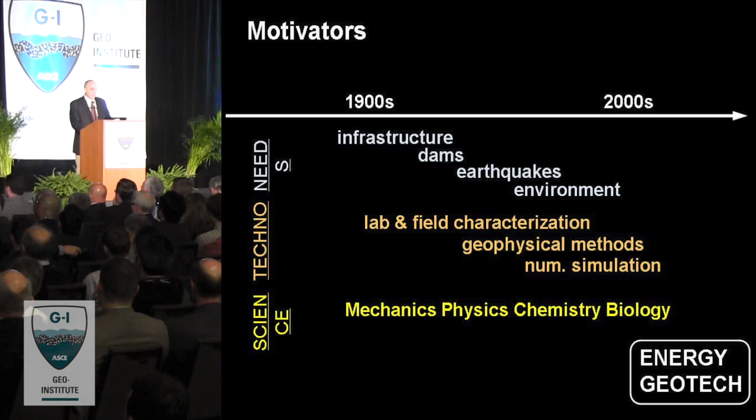Today, I would like to explore the energy challenge. Why energy? Because whenever we seek the ultimate goal of having a pleasant life with great quality of life, we see that it is basically controlled by the availability of energy.

It is so much so that if we plot most quality of life indicators, they exhibit a great correlation with power consumption, be that life expectancy, infant mortality, or ability to receive an education. Some of these parameters can be combined into an index we call quality of life, and we see the very strong correlation with power consumption.

We can track these numbers for the last two or three decades, and we see a very clear trend: all countries are improving quality of life. That is the good news.

But we're all doing it at the expense of consuming more energy, to a point that this may become unsustainable. Today we consume 17 terawatts. That is a huge number. And in the next 25 years, we are going to have a demand for 50% higher energy consumption.

Let me put this in perspective. That would be approximately 10,000 nuclear power plants of the largest ones we've ever built, and we have only built about 500 in the last 60 years. This is the amount of additional energy we will have to produce to sustain current growth.

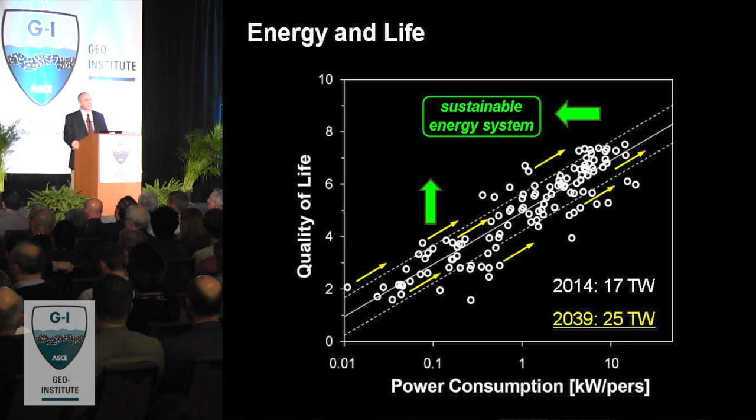So I think that as geotechnical engineers, we have to think very seriously about what we can do to contribute to the development of a sustainable energy solution, whereby the developing world can increase quality of life with minor increases in energy consumption, while the developed world can decrease power consumption while still improving quality of life.

In order to understand some of these problems, it is good to go back and see what our energy sources are and what is the origin of those resources. Let's focus on one of them: fossil fuels. 85% of our energy or more, worldwide, is based on fossil fuels. That means coal, gas, and petroleum.

And you may wonder, how did those form? Let's look at the history of the Earth as geotechnical engineers. The Earth is approximately 4.5 billion years old. At the beginning it was abiotic, and life appeared approximately 3.5 billion years ago. During that early stage, the atmosphere was basically a heavy CO2 atmosphere, but microorganisms fed with energy from the sun began capturing the CO2, converting it into organic mass, organic carbon, and releasing oxygen, and that had a tremendous effect changing the atmosphere. In fact, many of our minerals today are oxides and carbonates, both the result of the effect of these microorganisms.

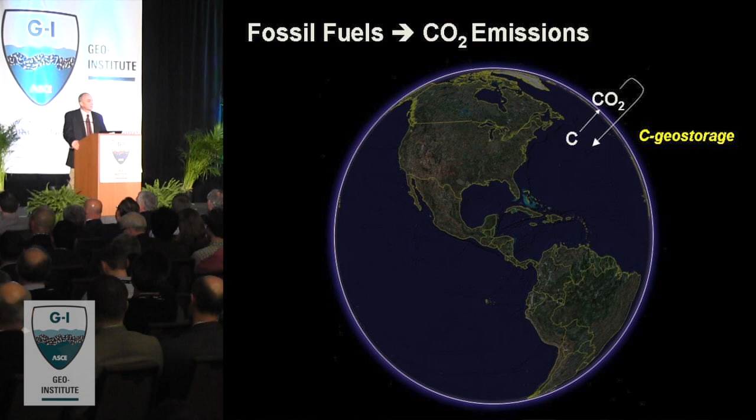When we analyze all the energy resources, we can go one by one, and in the manuscript you will find fairly extensive energy cards where I summarize all these geotechnical needs. There are few lines that are common denominators for all the energy resources.

We need to do proper site characterization, to get the right material properties for design, to develop proper monitoring strategies incorporated into reservoir management and disposal management, and to design the infrastructure not only to build it, but also to retrofit it. And why not to decommission it?

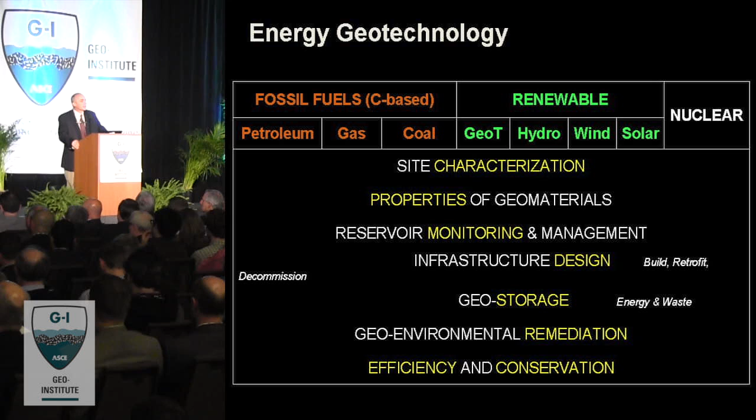We are in the process of decommissioning major nuclear power plants with great challenges, I may add. Furthermore, there are great needs for energy storage, as well as for the storage of energy waste, being fly ash, nuclear waste, or CO2. And of course, there are plenty of environmental related issues, and why not make our processes more efficient and conserve energy in so doing?

So as we are facing such a great challenge, we have to go back to the fundamentals, like Terzaghi did in the 1920s. This is a wonderful quote. Terzaghi said, Coulomb purposely ignored the fact that soils consist of individual grains. That was very useful for a while, but in fact it became an obstacle against further progress. So we need to go back and recognize that soils are made of grains in order to advance.

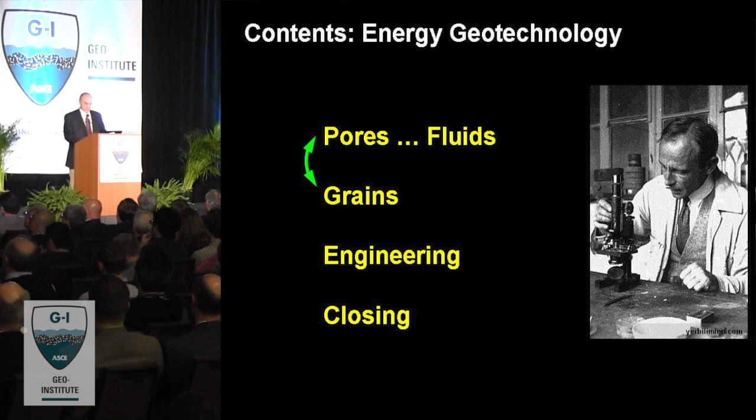And I'm taking that once again today, almost 100 years later, for the second part of the presentation, which will look at the essential of soils. And we are going to see the grains, but also the counterside, which are the pores, and the components that fill the pores - that means the fluids. And then the couple of evolving engineering problems.

So let's start with pore fluids. And you're going to see a sequence of nice movies and images. But once again, the important thing here is to understand the complexity of multiple processes that coexist. And the reason why fluids become particularly important in the energy sector is because there are so many of them in so many different phases. In our field, we have basically considered water and air, vapor, and to some extent the NAPLs and dense NAPLs.

Now the variety is much more extensive. So let's make a brief list. We can encounter gases, not only air, but also methane and CO2. CO2 with pressure and temperature becomes supercritical, or it could liquefy. We also find water, and in many places we are looking for layers filled with brine. Oil, of course, that will range from light to heavy oil, and sometimes solids will precipitate, or liquids may form ice or hydrate. We will observe some of these as we move along.

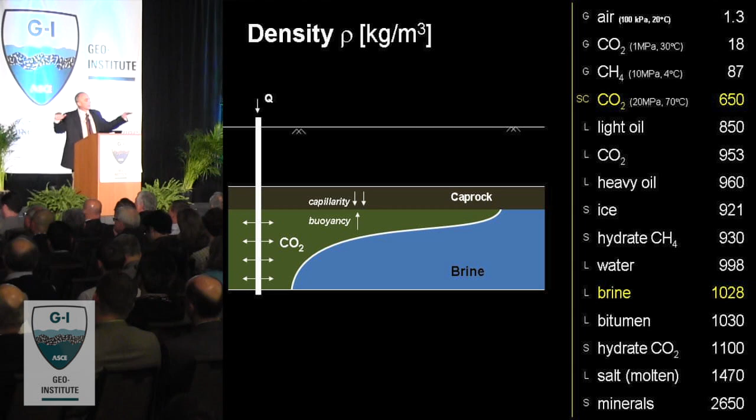There is a huge range in viscosities. When we talk about hydraulic conductivity, we pay attention to water, and that is controlled by the inherent permeability, which is basically varying in more than 10 orders of magnitude due to the specific surface and the pore size. Now we have to also recognize the viscosity. And as you can see, viscosity changes also in more than 10 orders of magnitude. The combination makes this combined parameter in a huge scale.

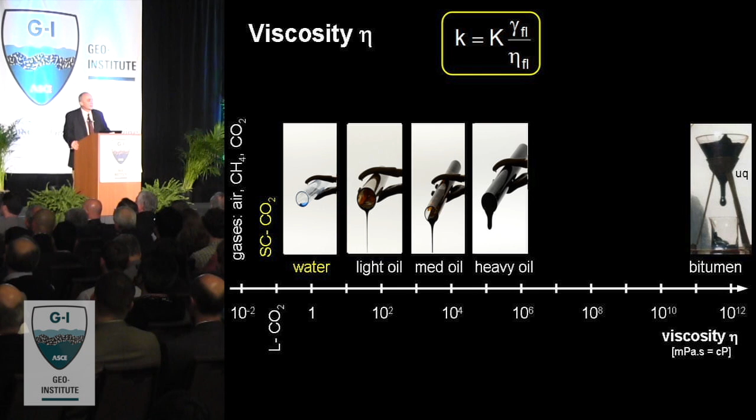By the way, it is not clear whether the last image is running or not, because that drop will fall in the next 8 years. That is the longest running experiment.

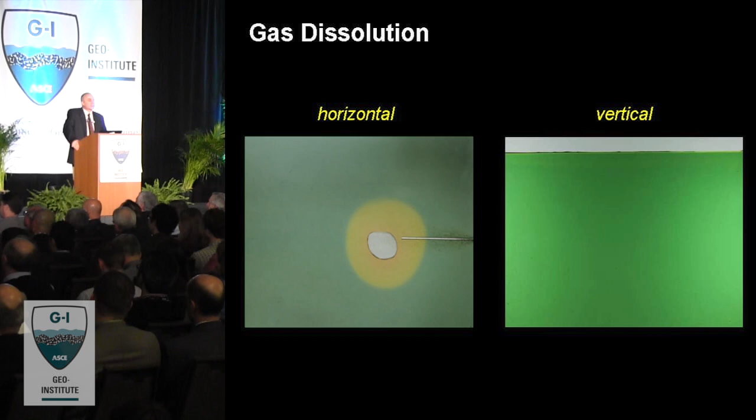Now, when we have gas and water, and we begin pressurizing, the gas tends to dissolve in water to different extents. On the left-hand side, you saw a droplet of CO2 dissolving in water. Water has a pH indicator, and what you actually saw is that as the CO2 was dissolving in water, it was acidifying, forming carbonic acid. That is the low pH of Coca-Cola, and it was diffusing away into the soil.

These are all time-lapse photography, so they are played at high speed. On the right-hand side, you saw that the CO2 is on top of the water, and as the water intakes the CO2, it becomes heavier, and it creates these tears and convective currents that will sustain the process going. This is the dissolution of gases in liquids.

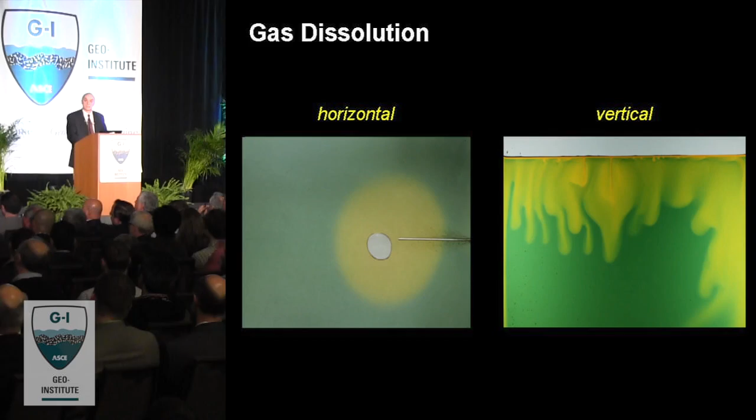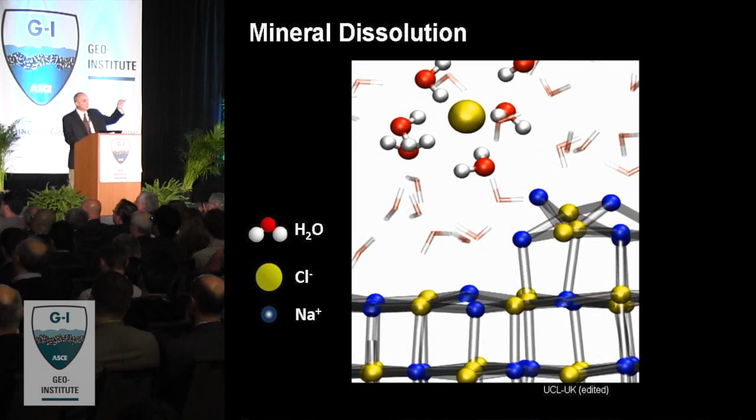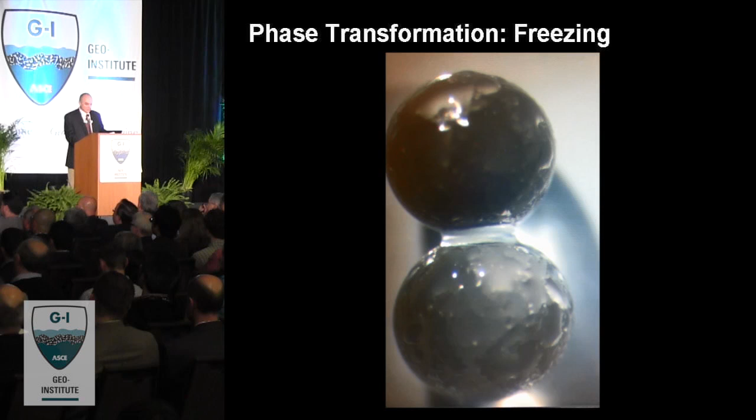When there are phase transformations, the water freezes, and it will all depend on whether the water likes the mineral or not. It will actually form an ice sheet on top, or it will just remain localized at the contact. But there is one type of phase transformation which is quite exceptional. Typically, when water freezes, it excludes anything that is not water, for example, ions. However, if there is methane, the methane molecule can get locked in, trapped, surrounded by water molecules that form a cage. This is called methane hydrate.

It takes relatively high pressure, let's say 600 meters beneath the ocean, and low temperature for this to happen. But you may be surprised to know that we find methane hydrates offshore pretty much everywhere around the world and beneath the permafrost. And there is more carbon trapped in methane hydrates than in coal, petroleum, and gas. So this could eventually become an exceptional energy resource, with a caveat that if it gets released into the atmosphere, it's a devastating greenhouse gas.

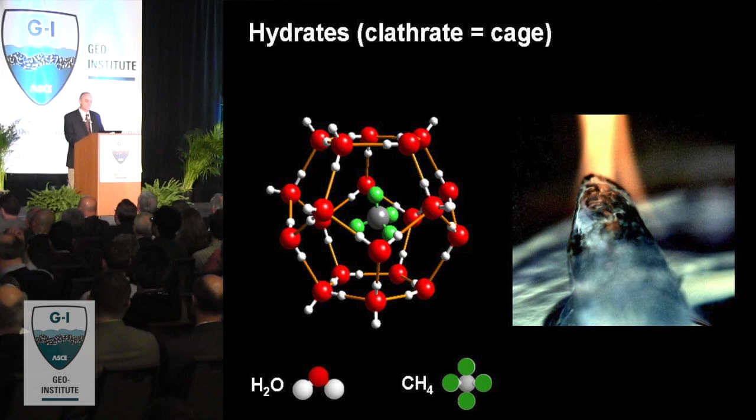Another part of the fluid-related processes that we need to recognize is that there are many of these processes that produce very pronounced volume expansion. Of course, we're all familiar with the expansion of water to form ice. That is only 9%. When we open a Coca-Cola can, it will expand probably 50%.

If we take methane hydrate, the one I just showed you before, these little cages of water with methane molecules inside, it will expand 176 times, not percentage, times. And of course, the wonder of the steam engine is that when water vaporizes, it expands more than 1,000, almost 2,000 times. Let's put that into perspective. When we take a soil and we shear it and measure the volumetric dilation, that rarely exceeds 10%.

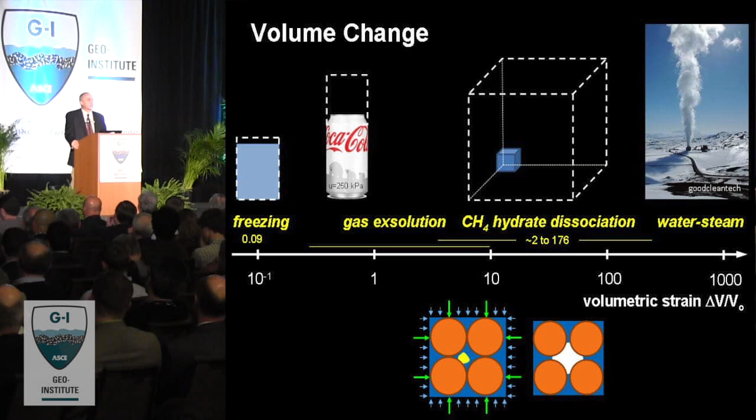So now imagine having these fluids that will expand hundreds of times. What will it do to effective stress and then soil behavior? What you see is a little sketch of a methane hydrate crystal at the center that will expand when we reduce the pressure. When we sample it, it will expand this 176 times. And it will develop capillary forces that will push grains out. What you are going to obtain with standard sampling is something that looks very much like chocolate mousse, a completely destructured sediment that is impossible to characterize. We will come back to this.

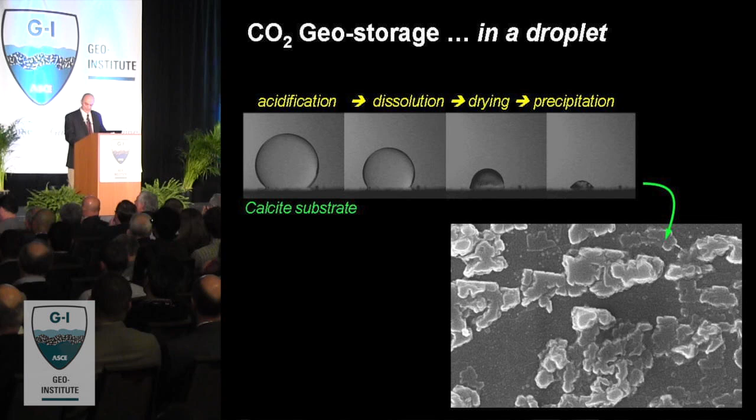But CO2 dissolves into the water, and it makes it acidic, and it begins dissolving the calcite crystal. When water continues evaporating, it cannot handle the dissolved calcite anymore, and it will reprecipitate it on the surface. Let me show you that that is indeed the case. When you look with a scanning electron microscope, you see all the reprecipitated calcite. These two processes, dissolution and precipitation, are going to be continuously occurring. In fact, they are continuously occurring in our sediments, but are going to be exacerbated in energy applications.

To summarize the first part of pore fluids, we can encounter them in many different phases. They have a very wide range of properties. They will trigger dissolution and precipitation exsolution processes. There will be phase transformations, and in many cases, those will be accompanied with very large volumetric changes, which will dramatically affect soil behavior.

If there is anything that in our field we have made great advances, and that we are the holders of understanding that nobody else has, it is in unsaturated soil behavior.

As you saw earlier, this is all going to be pretty much about mixed fluids. So my question now is, for all those of you who work in the field of unsaturated soils, how easy it is to transport our knowledge to other energy-related applications.

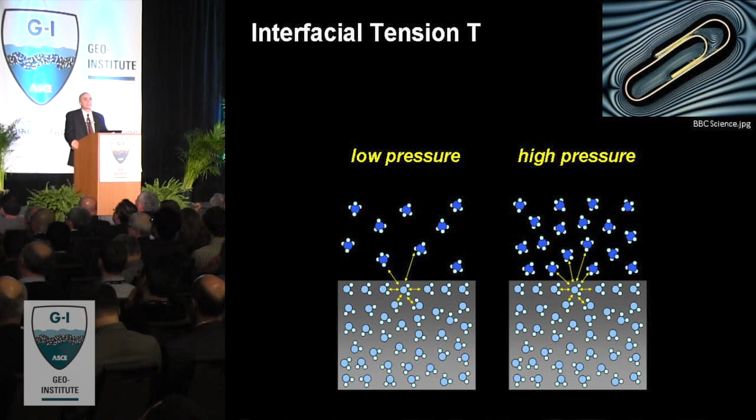Well, it all starts at the molecular scale. The reason why we can float a paper clip is because of the formation of this interfacial membrane that develops at the interface between two fluids with limited miscibility. On the left-hand side, in the lower part, you see water surrounded by methane molecules at low pressure. There is limited compensation of intermolecular forces. But as we increase the pressure on the right-hand side and we have a higher gas density, there is better molecular interaction, better compensation, and interfacial tension should decrease. Therefore, interfacial tension is pressure dependent.

Now, the contact angle, when we have the two fluids interacting at the mineral surface, also becomes pressure dependent. And the fluids may like the mineral, depending on their mutual preferences, or not. Typically, we always talk about capillary rise - that is when the water likes the mineral. But you could have negative rise in the case of, for example, oil or mercury.

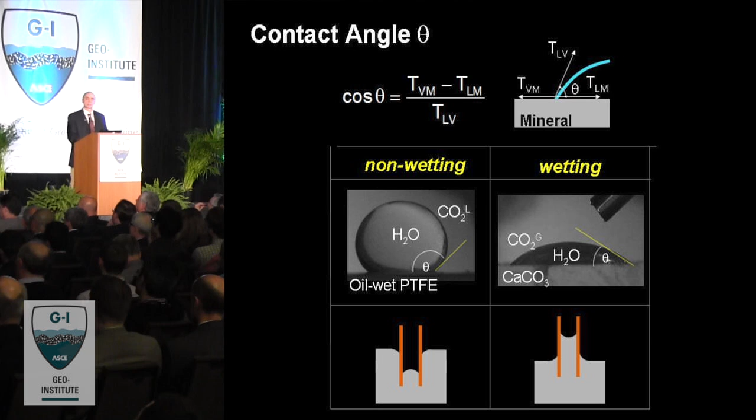So we have to pay attention to these two parameters in understanding unsaturated soil behavior in the largest scale of energy applications. Let me demonstrate that this is indeed the case, that pressure alters these parameters.

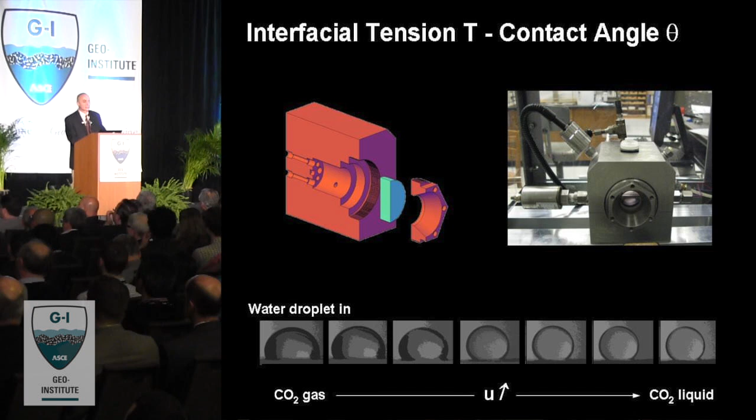You are watching through a very thick sapphire window at the water droplet on top of Teflon. We surround it with CO2. We begin squeezing the CO2, increasing the molecular density, and you see how the water droplet changes shape dramatically. The reason is the contact angle is changing. The CO2 likes Teflon more than the water does, and the interfacial tension is changing. This is going to happen within the reservoir.

To summarize, in our field of unsaturated soil behavior, we have consistently thought of pretty much water and air - that is 72 millinewtons per meter surface tension. But actually, this can change in a wide range, and we can actually engineer it with detergent, with surfactant, and bring it down to very low values indeed.

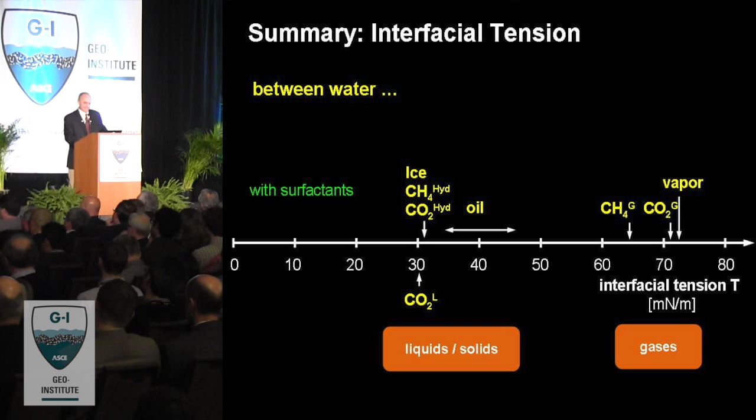At the macro scale, there are a couple of fundamental concepts that we use extensively. One is suction, the pressure difference between the two fluids, and the net stress, which is the difference between the boundary stress that we apply and the air pressure.

The other macro scale concept that captures pretty much the structure of the soil is the soil water characteristic curve, that gives us an idea of how the fluid is interacting with the pore size distribution and pore size connectivity in the sediment. I will not mention much more about the entry pressure, but it's going to be a very critical parameter in many aspects of the energy cases.

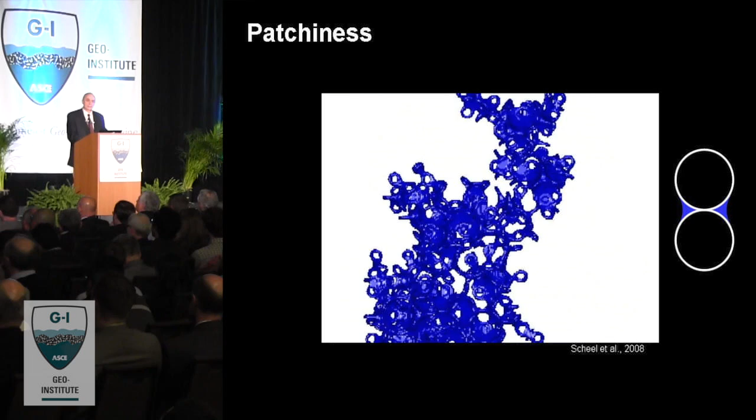And you see that these water menisci form interconnected patches of water, and everywhere else, there is pretty much not water. Therefore, imagine the interparticle forces with the addition of the capillary forces. This is quite a complex and inhomogeneous situation, which adds some complexity to our understanding of unsaturated soils.

Precipitates would like to do so in the largest pores. So if we have hydrate formation or mineral precipitation, this will occur in the largest pores. And if we close the largest pores first, our soil water characteristic curve will be significantly affected, particularly on the right-hand side, where the entry pressure is.

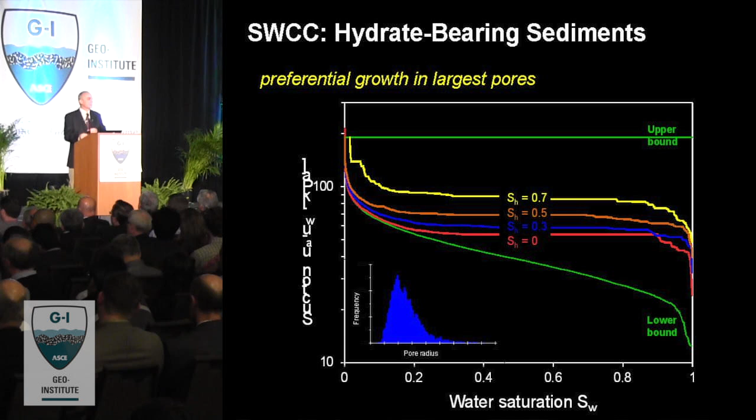Now, if we begin dissociating the hydrate, the soil water characteristic curve is changing because we're removing that solid. And so we have a continuous time-dependent process, adding significant complexity to all this analysis.

Another departure from what has become classical in unsaturated soils is the fact that in unsaturated soils, the air invades quite homogeneously the previously saturated medium. However, when you open a Coca-Cola bottle, you create bubbles, you nucleate bubbles everywhere. That means that when...

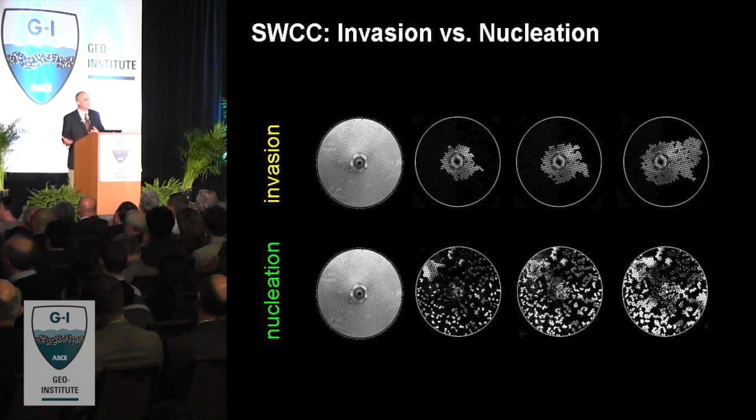water with dissolved gas or oil with dissolved gas, what is called foamy flow, or hydrate begins dissociating, we're going to see gas developing everywhere, like you see on the lower micro model on the lower set of images here. The upper part is when there is invasion. The lower part is where it nucleates everywhere. So we have to rethink what are the implications to the soil-water characteristic curve, the Van Genuchten equations, the relative water and gas permeability, etc.

Finally, in this reanalysis of unsaturated soil behavior, I would like to highlight that we tend to assume that there is thermodynamic equilibrium. That means that things have homogenized throughout because it has been the result of a slow process. In fact, many of these tests take typically 6, 8 months or 1 year to do a proper soil-water characteristic curve test.

However, that is too long for the removal of petroleum or gas. So there will be no thermodynamic equilibrium, and in fact, what is going to happen is that we mobilize viscous forces. If we're injecting CO2, remember supercritical CO2 has much lower viscosity than water. That CO2 is going to go through the largest interconnected pores and finger through, and the rest of the brine is going to remain behind. We're going to have very inefficient invasion when we inject CO2.

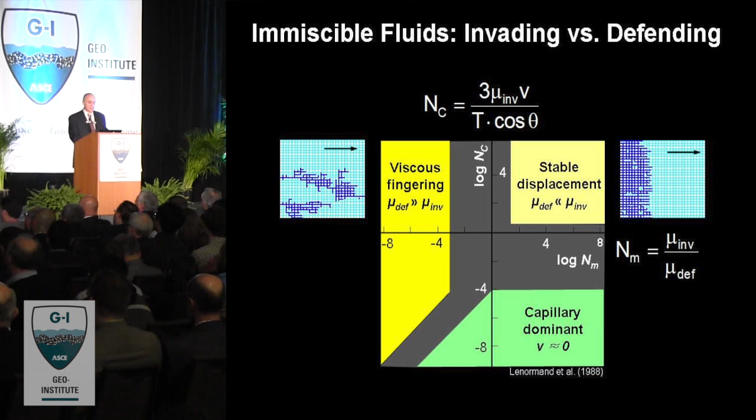Conversely, if we were pushing a very viscous fluid against a defending saturating fluid of low viscosity, we are going to have a more homogeneous front. On the lower half of this plot, we have classical unsaturated soils. On the upper part, where velocity gains relevance over capillarity, we have to look at the relative balance between the fluid viscosities.

Without any further demonstration, I'd like to say that it may surprise you, but the same way we talk about interfacial tension between water and air, or water and oil, vinegar and oil, there is also interfacial tension between water and ice, water and hydrates.

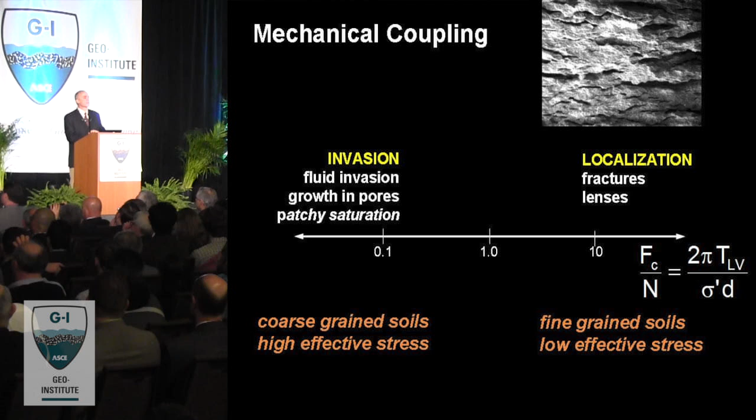We can extend all these concepts to all these other materials. For example, if capillary forces are greater than the effective stress-related forces, which happens when effective stress is low or the grains are very small, capillarity will prevail, and we form gas-driven fractures, ice lenses, hydrate lenses. Otherwise, when effective stress is high and capillary forces are small, the diameters are large, we have a completely different invasion mechanism and pattern of solids.

To summarize mixed fluids: we need to recognize the wide range of fluids involved and their phases. The surface tension and contact angle are not constant anymore, and in fact they vary with pressure, and we may control them, we may engineer the system.

The residual saturation that we're concerned about in unsaturated soil behavior is what controls our ability to recover gas and oil. In fact, we leave approximately 50% of the oil in the reservoir because of residual saturation. That entry pressure that we didn't say much about is the one that controls how far that pancake of CO2 spreads out and whether the seal rock will be able to hold the pool underneath. The soil water characteristic curve has to be reconsidered, and there are several instabilities that may affect the process, and we need to understand them better to analyze these systems properly.

That was one part of the presentation. We were looking at the fluids and the pores. Now I would like to look at the grains that make the sediments. We are going to do it in three stages: the genesis, to pay attention to post-formation changes, and I will highlight why, and then to look back and reconsider classification of soils.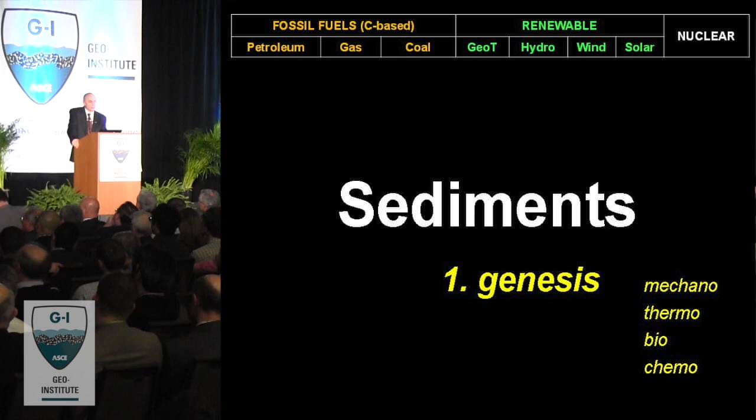We typically talk about genesis as weathering of rocks followed by a transportation agent. Well, when we look at the whole energy sector, we run short with such descriptors. In fact, we have to look at mechanical, thermal, biological, and chemical processes in the formation of grains. A few slides to demonstrate the case.

Mechanical forces are big enough when the grains are large, so the impact between grains can cause damage, or the abrasion between grains can alter their shape. Therefore, mechanical forces can only explain the formation and evolution of coarse grains and a few soils, for example, beneath glaciers.

Thermal processes are also very critical. This is an artificial one, man-made, which is fly ash. Because it formed from a melt, you see the effect of surface tension in this nice spherical shape of fly ash. By the way, the fly ash had lots of gas during formation. Some of these will be hollow, and some will be like cenospheres. Be careful, the specific gravity is not 2.65 anymore. It can be from 1.7 to 2.2, 2.3, which completely messes up our thinking of void ratios, etc.

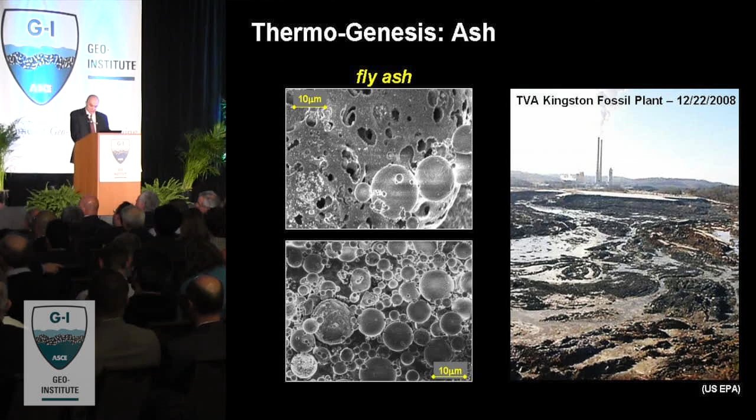These materials, even when we call them non-pozzolanic fly ash, do develop some early diagenesis, let's say within a week. They increase their stiffness significantly and may lock porosity because they will not consolidate so nicely. Some of the consequences are seen, for example, in the failure of the TVA Kingston storage, almost six years ago now, five years ago.

The natural example of that is volcanic ash. The same happens when molten lava explodes and comes out. Typically we don't see this, but you also see the surface tension here in the shape. Most likely it came out with so much gas that those bubbles actually exploded, and you see the shreds, the shells, the pieces, and the concave shapes left by the gas. This is, for example, the formation of Mexico City soils.

By the way, the volcano is called Popocatépetl.

That's to practice the language there.

Those ashes fell on a lake, and water-mediated processes of dissolution and reprecipitation form what is Mexico City soils today. However, how can we explain that a soil with a liquid limit that can reach 400 can exhibit a friction angle that can exceed 42, 44, 46 degrees?

We need to look at the other genesis, which is biogenesis. There was lots of bioactivity in the lake, and that led to the formation of diatoms. Whenever we encounter diatoms in our soils, like the Cooper Marl, Ariake clays, or Mexico City clays, we always see exceptional combinations of liquid limit and friction angle that we cannot explain otherwise.

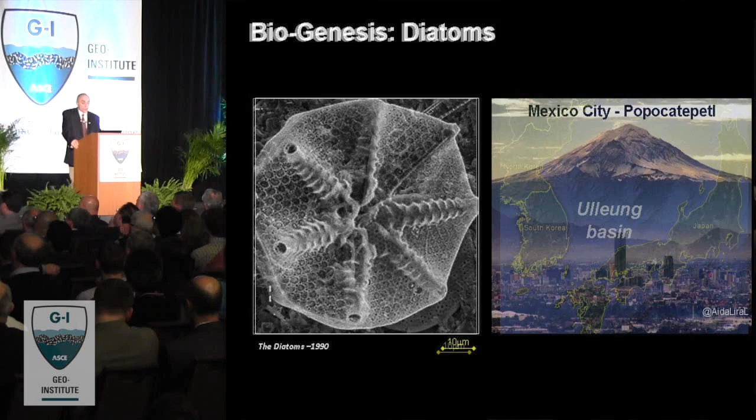When we go offshore, here I'm showing an example from the Ulleung Basin between South Korea and Japan, we encounter complete layers. You still see some diatom here, but everything else is crushed diatom - very small pores, huge porosities, behavior that is non-plastic, yet very high liquid limits.

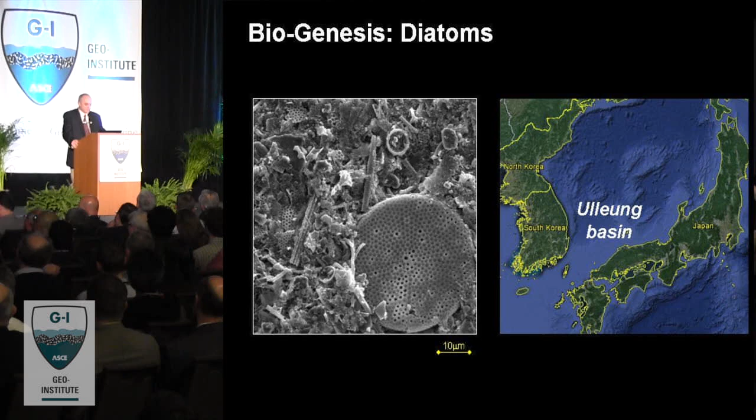So we saw that there are different formation mechanisms leading to different particle shapes, different sizes, and different mineralogies. Let's explore the consequences of size.

When we analyze all the forces acting on particles - the forces that cause motion of particles, because there wouldn't be strain, there wouldn't be shear without unbalanced forces at the particle level - we realize that these forces all depend on particle size, either linearly, quadratically, or cubically.

Just for the sake of this presentation, let me explore the balance between a couple of these forces. On the lower part of this plot, you see the balance between the effective stress-induced force on grains of different size, when the effective stress is just nominal - 10 centimeters of soil, 1 kilopascal. You also see the capillary force that can be mobilized between grains due to the water menisci that forms between grains.

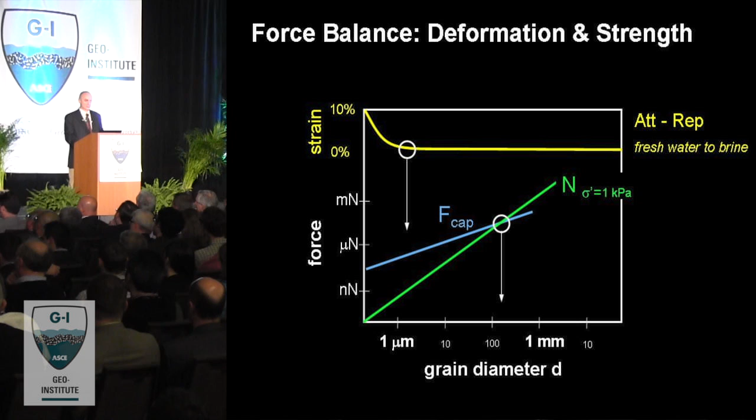Therefore, there are two very important ranges here where the physics changes. For small particles, we have to begin paying attention to capillary and electrical forces. Summary: we have already seen the relationship between genesis, size, shape, and forces.

And what is very interesting here is that that is where the sieve 200 is. The sieve 200 is an exceptional choice. It's more than just a convenient choice for laboratory purposes - it's an exceptional choice from a physical point of view.

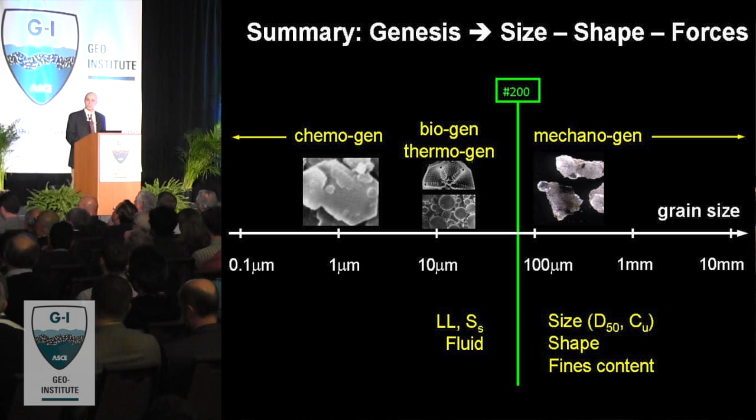Furthermore, in order to better understand the fine grains, we have to pay close attention to the fluids. In the coarse grains, we need to add a little more information, particularly we have to emphasize particle shape, not only size and uniformity. So we saw that there are different geneses, the importance and implications of genesis, and the relevance of the sieve 200.

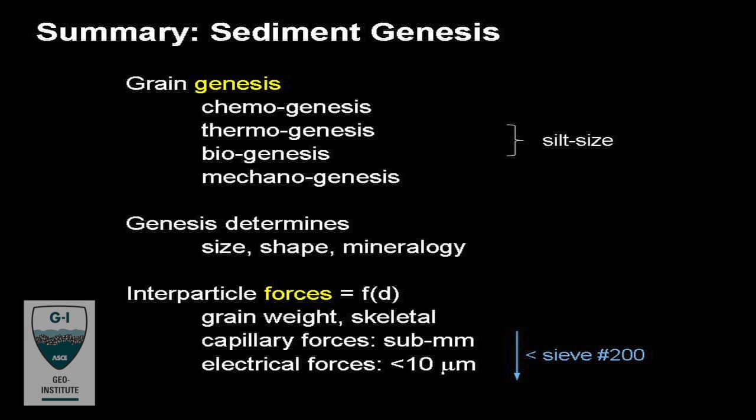Most of our engineering projects have been for, let's say, one generation. Somehow we have decided that the next generation has to build its own infrastructure with the latest technology, and so we do like to take a 25, 30-year horizon in our designs.

However, when we look into energy, in many energy applications we would like the CO2 to remain down there for tens of thousands of years, and nuclear waste probably for 100,000 years. So our time scales now are competing with the time scales of geological processes. Remember, fly ash is changing in one week, and Mexico City soils and Colombian volcanic ash soils form in less than 10,000 years.

And now we're beginning to think of engineering projects for longer time scales. So we cannot think of soils as being inert anymore, and we have to go back and look at dissolution and precipitation. But this time I'm going to do it from the scale of the soil to see what are some of the implications.

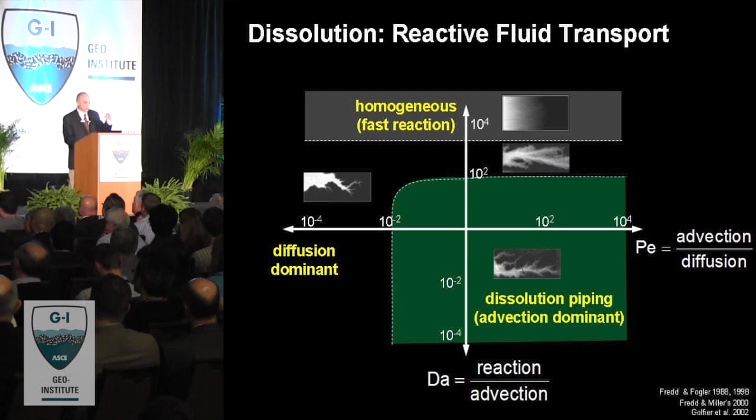Now let's follow the logic. The water invades and dissolves grains. Where it dissolves grains, the pore increases. The pore increases, there is more water flow. There is more water flow, there is more dissolution, and there is a positive feedback mechanism that creates the formation of dissolution pipes. So under certain regimes we have to be very careful, and that could happen in dams, and we have seen many of those cases. It can also happen naturally with acidic rainwater, which naturally acidifies going through the organic matter and the atmosphere as well.

What happens in that case? Let's see an experiment to test if this is true. This is calcareous sand from the Savannah River site, across the river from Georgia, and we permeate this sand with acidified water. After some time we take the specimen. This is in an oedometer, and we create a very homogeneous flow field. Instead of dismantling the specimen, we put it in a tomographer and take multiple slices, and we see all these fingers of dissolution, where some of the minerals have been preferentially eroded while the quartz remains.

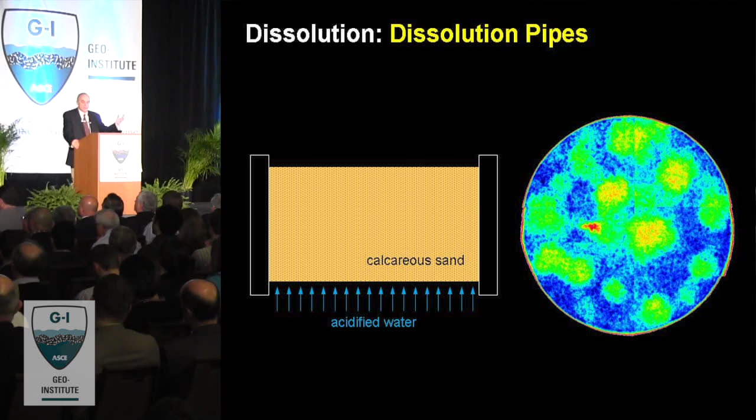Now we would like to understand the implications of this localized dissolution. So we take discrete elements. We also make an oedometer with all the yellow grains. However, in certain preferential columns, some of the grains we let dissolve.

Then we see how the forces evolve, and all of a sudden you see that the following force pattern develops. Where there is no dissolution, the grains have to carry most of the vertical load. However, in the columns that dissolve, the grains are not picking up the vertical load anymore, but they are laterally holding the columns so they don't buckle. In those dissolved areas, there has been a 90-degree rotation of the principal stresses within the same soil mass.

The consequences can be quite scary. In the last two or three years, while building two of the very few new nuclear power plants in this country, here in Savannah near Augusta, Georgia Power, or the Southern Company, decided to actually excavate the upper 120 feet to make sure they would go below the layer that was experiencing localized dissolution.

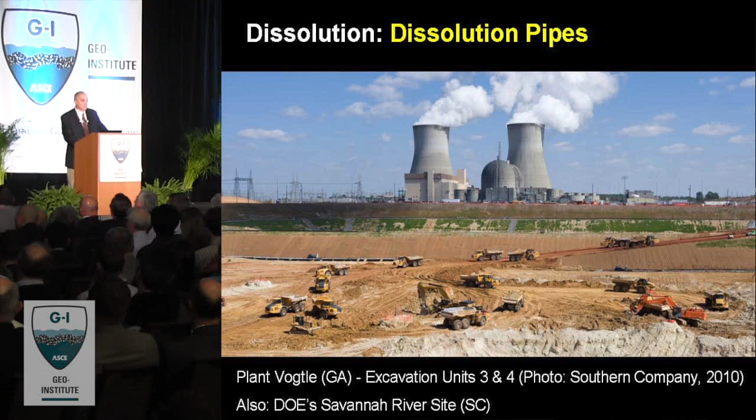An expensive proposition, but it was key to avoiding the risks involved. Remember that when dissolution is very fast compared to the rate of advection, you have homogeneous dissolution. So let's simulate that in the laboratory once again.

This is once again in an oedometer cell, but it allows us to measure K0. This is at the beginning, before dissolution; K0 is about 0.6 in this case. Then we start dissolving and see what happens to K0. K0 goes down, it reaches 0.3, and then if we continue dissolving, K0 increases once again. This low value is Rankine's active earth pressure coefficient. Let me translate that: the soil reached failure under zero lateral strain conditions.

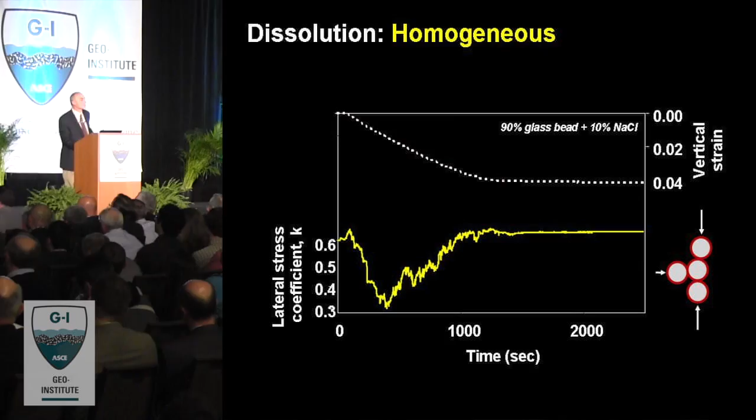We always fail the soil in a triaxial test. No, this is in an oedometer when the soil is experiencing dissolution. So once again, let's go back to discrete elements to see what happens when we do that. Now we're dissolving grains, and you see that in certain areas the forces are homogenizing. However, in some bands the forces are becoming very strong, and in fact those are shear bands. So not only does the soil fail, but under certain conditions it may experience shear banding under zero lateral strain.

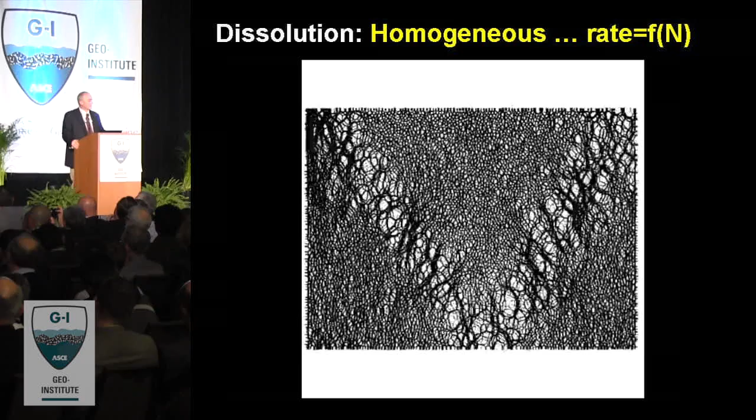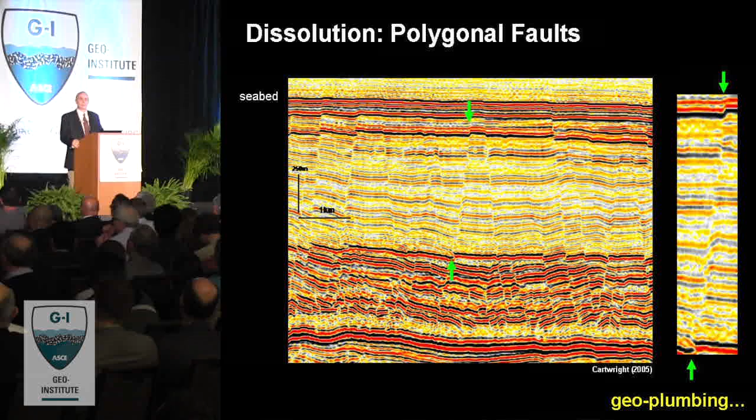And if you think this is a numerical artifact, let me show you field evidence from all over the world. We encounter these polygonal faults at the bottom of the ocean that cannot be explained with Terzaghi's consolidation theory. We see that the bottom of the ocean has these lines, these are faults. If you magnify one of these, from green arrow to green arrow, you see discontinuities between layers. And when you expand this one-to-one scale, you see that they are all at 45 plus phi over 2. There is no extensional mechanism, there is no tectonics. The bottom of the ocean, contrary to what you'd expect from Terzaghi effective stress consolidation theory, is massively sheared, with tremendous implications for intercommunication between layers—what we call the geoplumbing.

We've been playing with points and counterpoints. The counterpoint to dissolution is precipitation.

If you explore the different forms of precipitation, we begin identifying a few common trends. One is that it may precipitate at contacts, like the formation of loess, which typically reflects unsaturated soils where menisci form. Two, it can cause surface coating.

We saw that in ice. It could be homogeneous nucleation in the middle of nowhere in the pore, but that is very unlikely. Most likely it will be heterogeneous nucleation, where it nucleates on the mineral surface and grows into the pore. And if you wait long enough, there is something called ripening, where all those minerals tend to come together and form these patches of cementation.

And as we showed earlier, if the forces that these cements develop are strong enough, they may separate grains apart and form lenses. We see that with pyrite, with hydrate, and many others like gypsum. These are, once again, analogs found in nature for different formations.

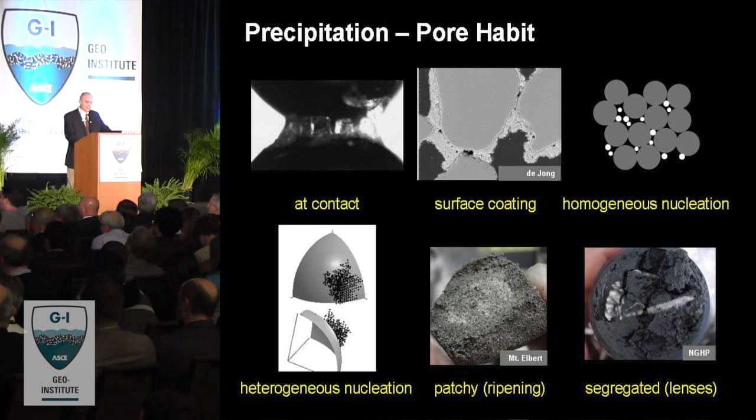What is the immediate consequence of precipitation? The most relevant and most detectable one is the increase in shear stiffness. On the left-hand side, you see the change in shear wave velocity, the arrival time of shear waves.

As we increase the effective stress, the travel time gets shorter and the shear stiffness gets higher. Then in the lower part, the stress decreases and the travel time increases. That is an uncemented soil.

On the right-hand side, you see exactly the same sand with minute cementation. The travel time is very short, the shear stiffness is very high, and the velocity is constant, stress independent, because now stiffness is cementation controlled.

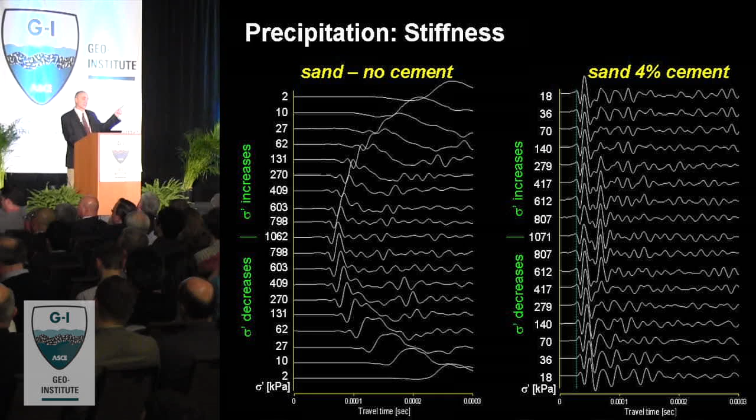Now, how effective the cement will be depends on the pore habit, what we described before, how it likes to precipitate. For example, here you see the effect when it precipitates everywhere, a little bit in every pore, or in patches. It affects the stiffness, the strength, the angle of dilation, the critical state parameters. So pore habit will have an effect as we try to anticipate the evolution of the physical properties of our sediments.

Post-formation changes are critical as we begin looking into long-term projects in the energy sector, where the time scales are going to be long. Therefore, as Jim Mitchell reminded us many times in the past, we must change our attitude. Soils are not inert.

Dissolution and precipitation processes are probably some of the most important ones that we should consider. And underneath all these, I was talking about coupled hydrochemomechanical processes.

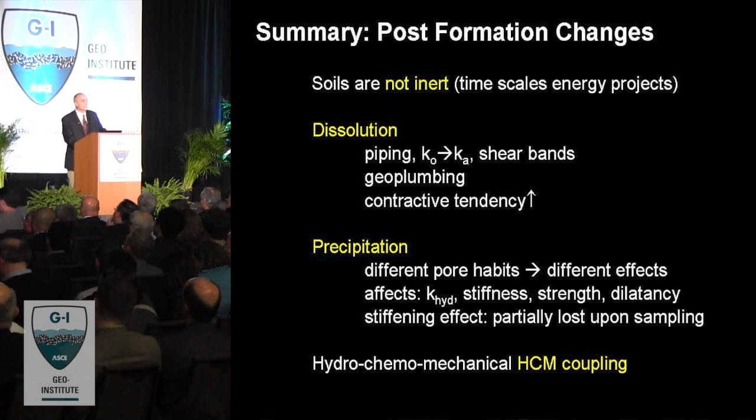We have spoken so much about sediments that I think there is a good opportunity to reconsider one of those basic concepts in our field, which is that of soil classification. The unified soil classification is the basis for soil classification all around the world, and it is indeed exceptional.

Look at the first decision that we make. We use the sieve 200, and we showed earlier what an exceptional choice, physically robust, the choice of sieve 200 is.

Then we keep going, and we ask whether there are enough fines to fill pores and affect behavior. If there are not enough fines, then what is important is how well the grains will pack. So for the clean sands and the clean gravels, we will ask about the coefficient of uniformity.

By the way, we should also ask about particle shape, which is as important as the coefficient of uniformity in the development of Emax and Emin, in other words, the packing of grains.

On the lower part of this plot, look at the first decision that we make: what is the liquid limit? And the importance of the liquid limit is because it tells us really how much specific surface there is in that sediment.

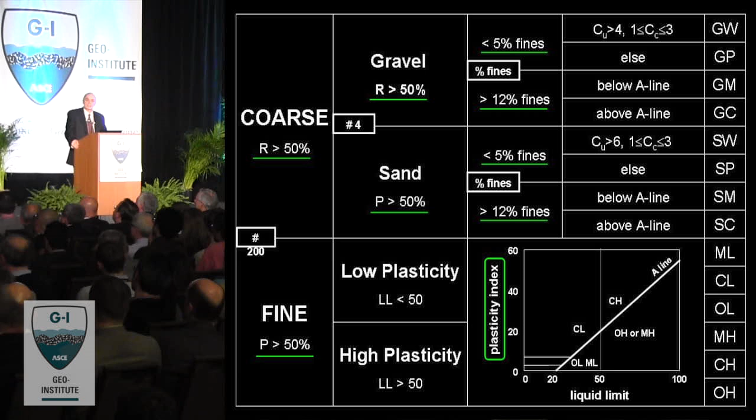Then we proceed, but at this point, I begin to have a few questions. We make choices and we choose 50% passing or 50% retained for gravels, for sands, for coarse, and fines. And one has to wonder whether this is true soil behavior, or some prevailing democratic principle from post-war in the 1940s.

Then we have to go back and look at the classification of fines. So let's explore some of these briefly.

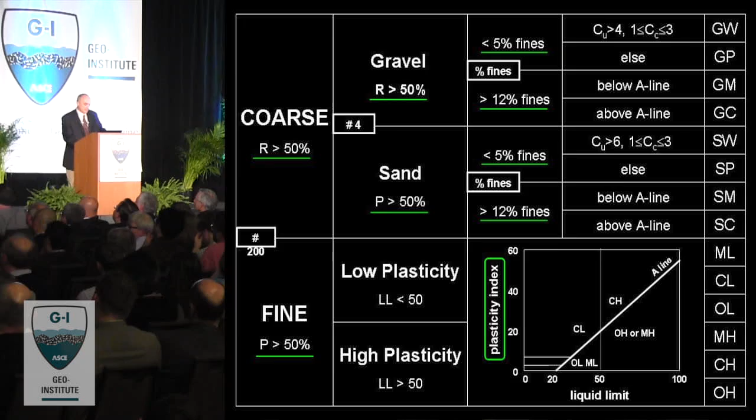If we do some gravimetric volumetric analysis, and see how much sand we need to fill the voids in a gravel, we can identify two boundaries here. One in which the gravel is densely packed and the sand is loosely packed—that will be the minimum amount of sand we need. Or the other case in which the gravel is loosely packed and the sand is densest—that will be the maximum amount of sand needed for that transition.

This Emax and Emin, as I just said, depends on coefficient of uniformity and particle shape, but in general it appears to be somewhere between 20 and 40%. It is not 50. Soils are not democratic.

Now you may wonder how we do this analysis for fines. In the case of fines, we cannot talk about Emax and Emin for the clays, so we pack the clays close to the liquid limit. Let's say at an effective stress of 1 kPa for the lower bound, with the clay picking up all the load, and we take a nominal load of 1 megapascal for the upper bound.

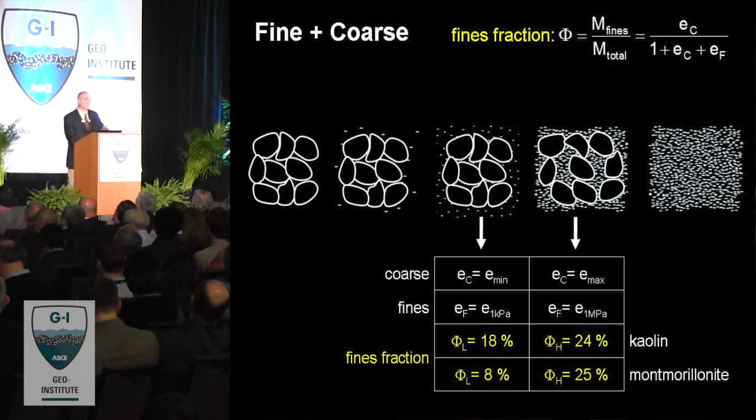Taking into consideration correlations between void ratios and compression coefficient as a function of liquid limit, we conclude the boundaries are somewhere between 8%, where you've filled all the voids with montmorillonite, plugged all the porosity, and hydraulic conductivity has dropped by 10 orders of magnitude, and 25%, where you actually pick up all the load. At that point, because compression lines converge at higher stress for different clays, it doesn't matter much whether you have a high or low plasticity clay. 25% is our number.

Let's go back to Savannah River. This is Savannah River data, and the liquid limit here is on the passing sieve 200. It's important that we reconsider our choice of running the liquid limit on the passing sieve 40, because those coarse components have a huge effect biasing the validity and meaningfulness of the liquid limit. Here I'm showing the liquid limit passing sieve 200 versus the fine fraction, and 50% would be the boundary that the unified soil classification tells us.

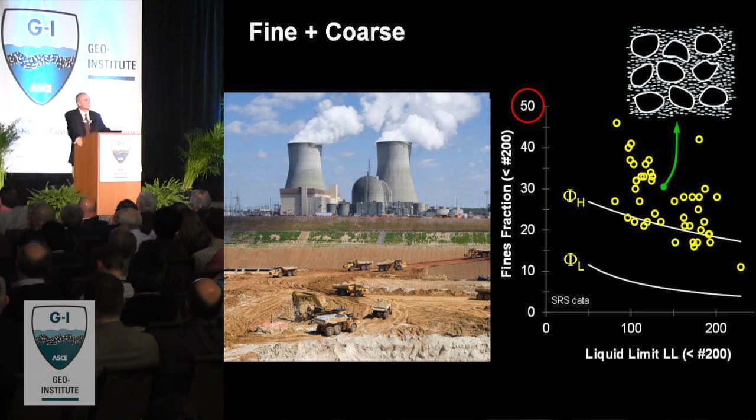So for all practical purposes, these are indeed sands with clays. However, they are above the upper limit, meaning without doubt the clays are picking up all the load. So the clays are controlling hydraulic conductivity, stiffness, and strength, and it is indeed a misnomer to call the soil a sand. As we move further, we ought to think about how we reanalyze soil classification so that the labels we assign are meaningful from the point of view of behavior and understanding.

So let's reconsider the lower part of the soil classification, the classification of fines. This is Casagrande's 1948 chart, and that is the A line. Notice what falls underneath the A line: organic material, but also a couple of clays, a couple of kaolinites. However, we call those silts. Now we have to think, what is the meaning of a clay? Is it clay size, clay mineral, or a material above the A line? There are multiple semantics for clays and they often confuse us.

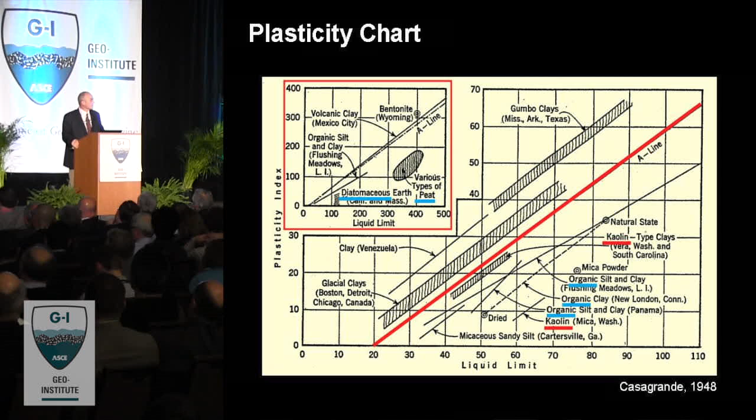When we look at the expanded version, we really grasp the purpose of this chart. There are two big blocks that Casagrande separated: diatoms and organic matter, which are like diatoms. Imagine a piece of wood—it has lots of voids inside, yet many pieces of wood behave like a sand, yet they would give you a very high liquid limit. So that is what they were really trying to separate, apparently.

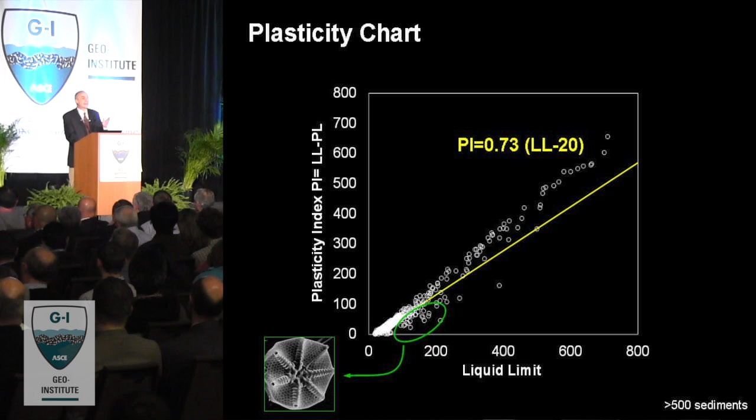That is the intercept. The second thing we have to wonder is, how come there is such a strong correlation? The reason is, this is the plot of the plasticity index versus the liquid limit, and the plastic limit is very small, so basically we're plotting liquid limit versus liquid limit. And that is the A line. What were they trying to do? They were trying to make sure the liquid limit was not the liquid limit of a clay—they were trying to pick up the presence of diatoms and organic matter. From an energy point of view, probably trying to pick up when soils become electrically sensitive may be a more important decision to make as we move forward.

In summary, let me suggest—this is just a suggestion at this point—how should we enhance our unified soil classification? We should change those 50-50 percentages for the definition of coarse and fine, and for mixtures of sands and gravels. And probably we ought to be thinking of calling something like the DIN norm does, some transitional soils in between.

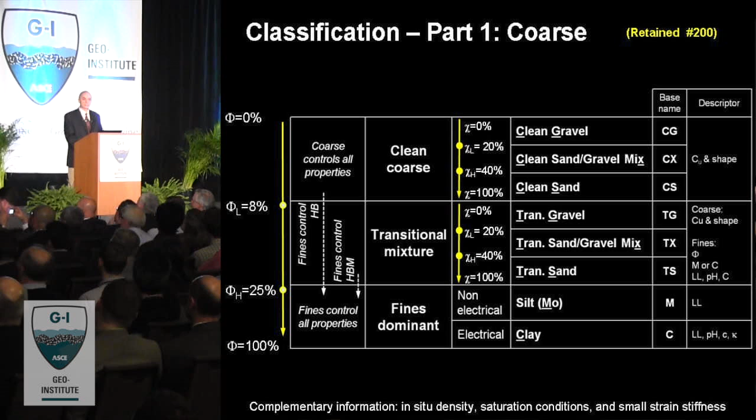For the fines, what is important is indeed the liquid limit. But to make sure we don't confuse a high liquid limit diatom with a montmorillonite, we ought to look at electrical sensitivity, which could be as simple as running liquid limits with deionized water and with brine.

Now, the concept of clay changes once again, and we're going to call clay those soils that are electrically sensitive, which is probably a meaningful definition when thinking of all the possible fluids that will affect our applications.

I'd like to finalize this section on sediments by saying that the unified soil classification indeed has great physical insight. It's amazing the intuition and physical understanding we had a century ago. However, we've gained much knowledge since, and we ought to consider updating the unified soil classification so the labels and behavior bring together a better relationship, adding more information on the coarse fraction shape, the fines, and the fluids.

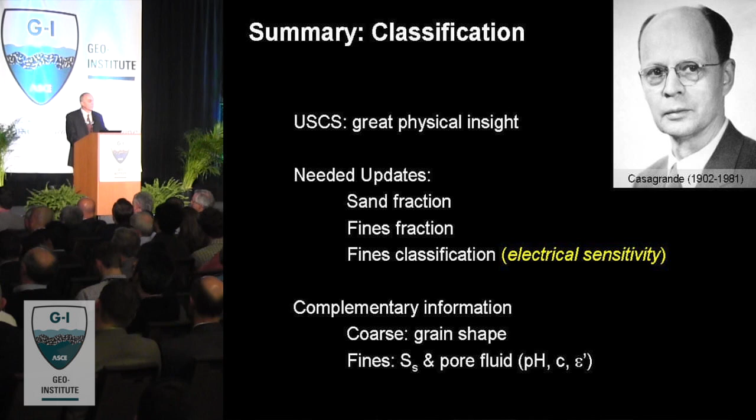The next section is very short, and I'm just going to tie together a few things we have already said and raise awareness of some challenging problems that are evolving related to energy applications.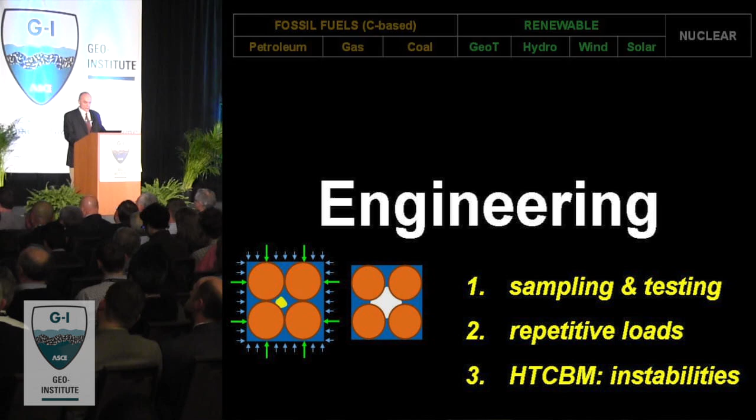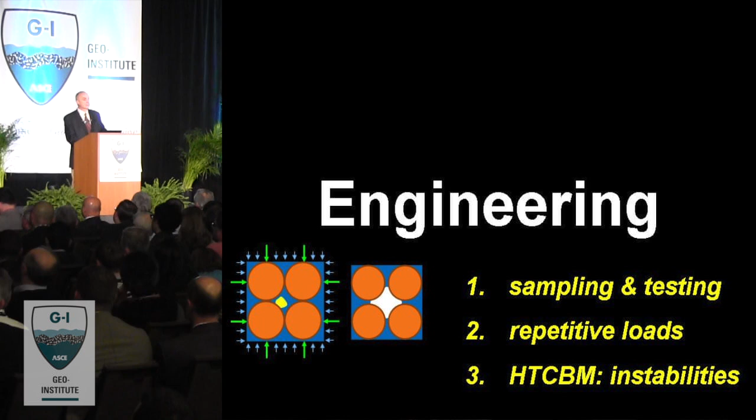Remember that sketch? That was the large volume expansion the hydrate experiences when we depressurize it. Hvorslev wrote an amazing manual in 1949 for soil sampling, but they didn't face the problem of gassy flow or very expansive conditions that we face in many of these applications where we start with high pressures. So how are we going to conduct sampling and testing when the material we get out literally looks like chocolate mousse? Let me show you what is developing nowadays.

This is the idea: we go to the middle of the ocean and push down something that looks like a piston sampler but has a big ball valve at the bottom. After we core or push the sampler, we retrieve it and close the ball valve, locking in the pressure. We bring it all the way to the surface with the full pressure, 20 to 30 megapascals inside.

So while the sediment may have experienced de-stressing and all the sampling effects of changing effective stress, it still retains the fluid pressure, the dissolved gas, the hydrate, without dissociation. Once it is at the top, it is placed in an autoclave, presented here with the core shown in orange, and we connect it to a series of tools.

We couple them, build the pressure on the left-hand side, equalize pressures, open the bridge, and now go and grab the core with a telescopic arm. We bring it back in, depressurize, close the ball valve, depressurize the bridge, disconnect the autoclave, and now have it here waiting for the tools to come in.

Remember, I want to cut the core, run a triaxial test, a direct shear test, an oedometer test, a flexible wall permeameter test, without ever removing the 20 or 30 megapascals, the 2 or 3 kilometers of water pressure. So the next step is we bring the tools, connect them, build the pressure, equalize it, connect, and transfer the sediments into the tools where the different measurements will take place.

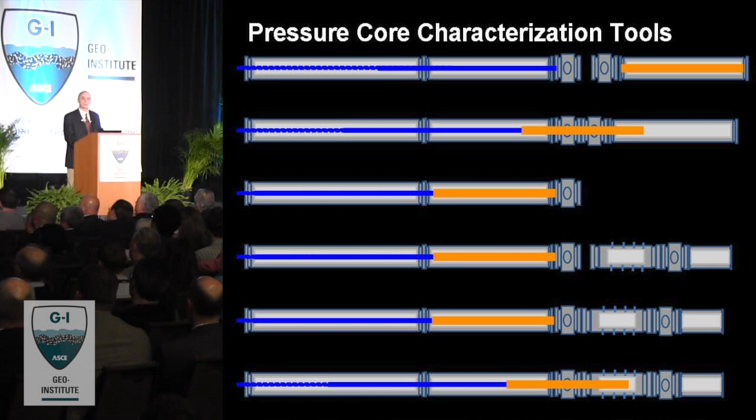Here it is, it has been built, and here are some examples. That is a hacksaw, the same hacksaw you have in your machine shop, but it's working internally at 30 megapascals. This is a direct shear box, a double ring direct shear box, and this is an oedometer, which allows us to apply the effective stress back again without ever depressurizing. It also has a flexible wall permeameter if we so desire. It produces exceptional data for sediments that could otherwise not be tested in any meaningful way.

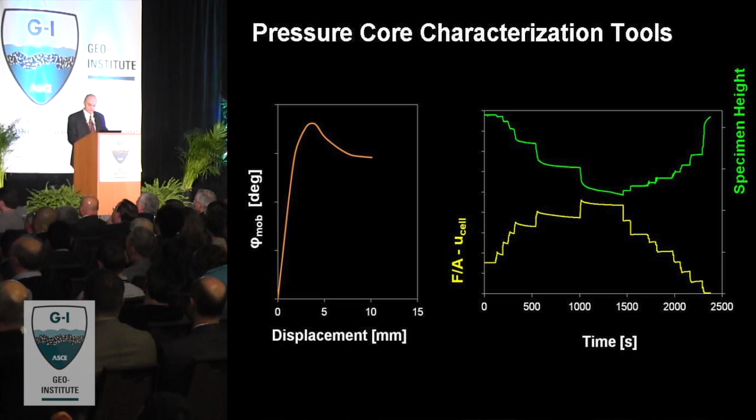The next topic that is going to be critical is that this long duration infrastructure, facilities, and systems are going to experience a large number of load applications. These loads could be thermal cycles, relative humidity cycles like in compressed air storage in caverns, thermal cycles again as shown in energy piles, or effective stress cycles like the foundations of wind turbines.

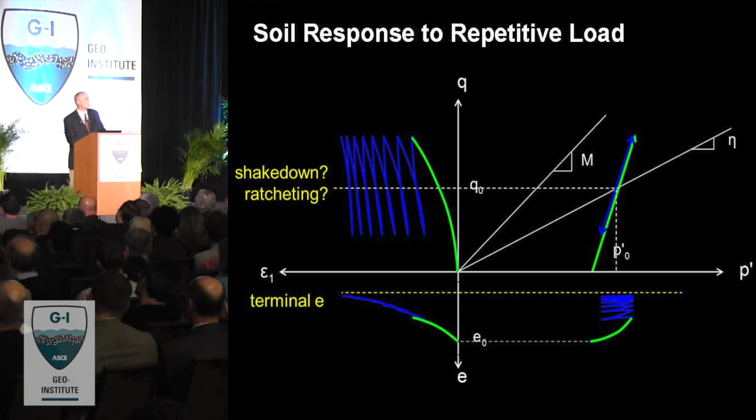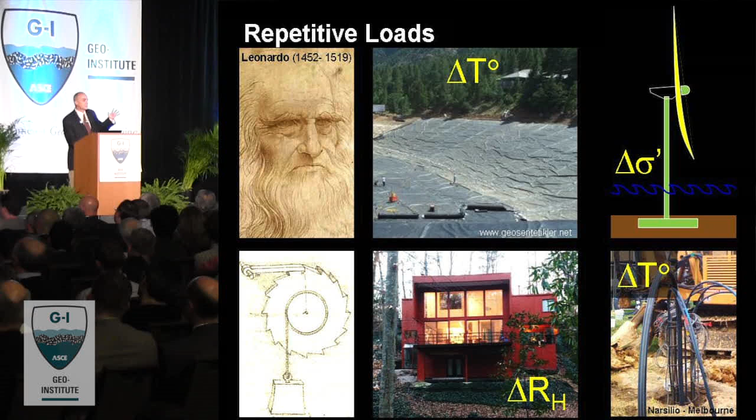From the deviatoric load point of view, it may be that the accumulation of deviatoric strains arrests and the system reaches what is called shakedown, but they may also continue going forever. In fact, that geomembrane, during the cooling and heating cycles day and night, began wrinkling because of thermal ratcheting continuously going down, with all the implications Kerry Rowe has told us about those wrinkles.

Now, the analytical models, the algorithms, and the experimental devices to confront these new types of loads are in their infancy, and we really need to devote much attention to them.

Just a simple example here, underneath the wind turbine: at the beginning was the result of static loading, and now 100,000 cycles are being simulated. You see the gradual accumulation of vertical deformation and changes in void ratio that may indeed affect the long-term performance of this foundation.

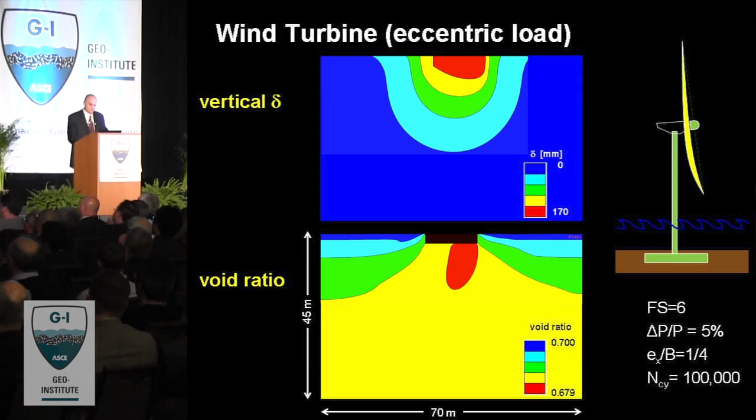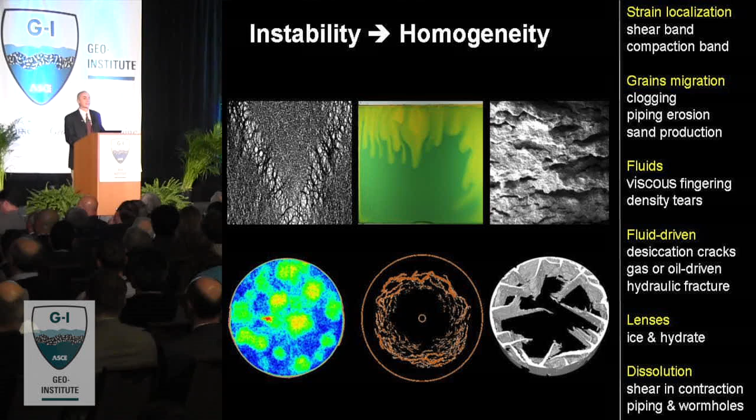We have spent the last 40 years talking about shear bands. There are many other instabilities that will affect our interpretation and our analysis of our systems.

Extending what I said earlier, we have hydro, thermo, chemo, bio, mechanical coupled processes, and some of those couplings lead to the emergence of confusing instabilities.

Closing thoughts. I hope I was able to convince you that energy is indeed critical to life, and that the energy challenge is huge, because we need to increase access to energy by 50% in the next 25 years.

There is a beautiful synergism here between our field and the energy field. For us, energy stimulates us to gain new insights into soil behavior. For the energy field, we are critical - we are at the core of developing a sustainable energy strategy for the world.

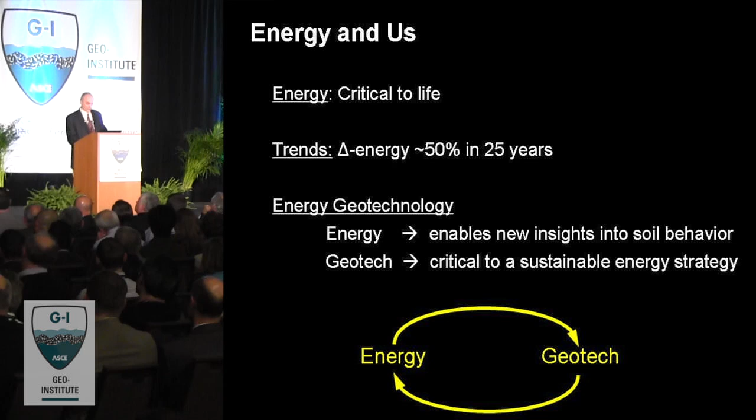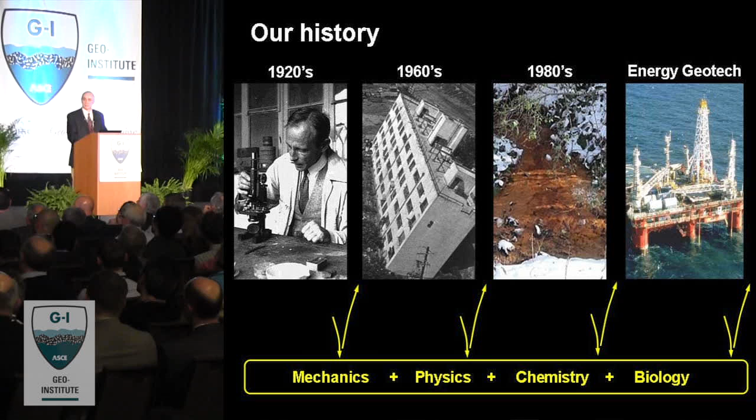Every time we've been challenged, we have gone back to our foundations. Terzaghi did it, earthquakes did it for us, environmental contamination did it, and now again in the energy sector. I think we ought to welcome this - it's an opportunity, an incredible opportunity to re-energize our field.

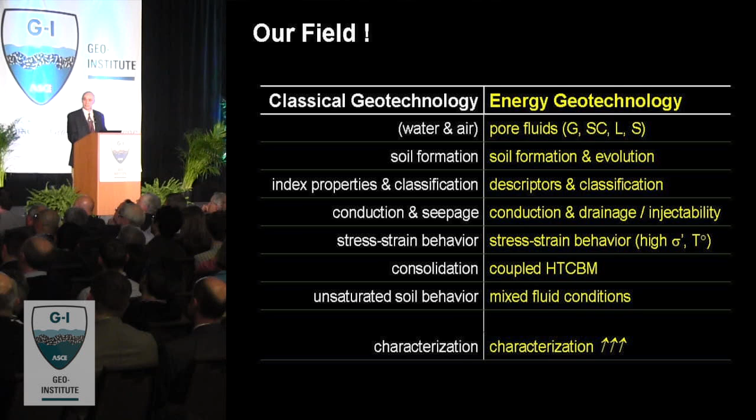On the left-hand side, you see the table of contents of our typical courses, and we see that energy geotechnology is nothing new. It's just extending what we know and recognizing that there are much higher effective stresses, a much wider range of temperatures, a wider range of fluids, and the long-term duration of these projects.

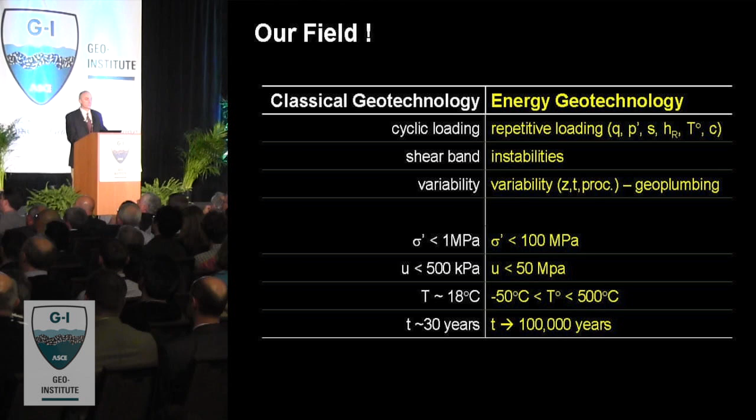For the younger members in the audience, those in their earlier careers, I think you are going to be at the prime of your careers, confronting this unprecedented global challenge. For those in practice, there is indeed an infinite number of great engineering problems out there, and let me add that it comes with great resources.

For those in education, I think it's time that we prune many of those obsolete and confusing semantics and misnomers in our field, that we renew our emphasis on the basics, and that we extend our curriculum to cover all the aspects we need. For those in research, it is indeed just fascinating. In all cases, I think this is a time of exciting challenges and opportunities, all with a spice of some sense of urgency.

I'm very grateful to many individuals and organizations, and to all of you for listening. Thank you.